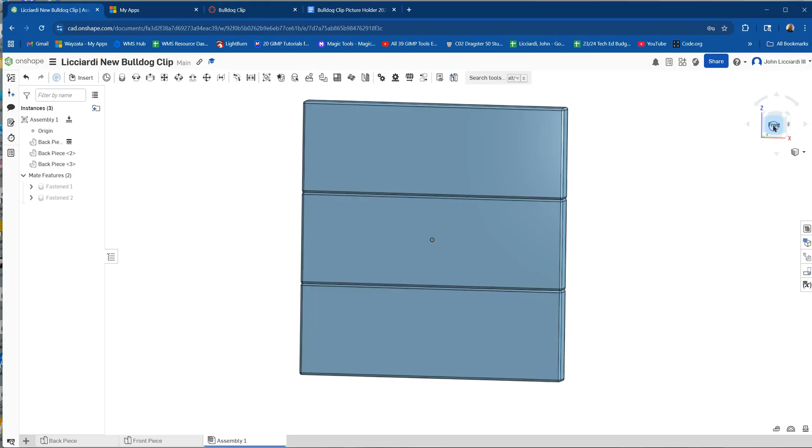Now in this particular case, I'm going to show you how to put the front pieces on with an offset, but we can't use the fasten mate. We're going to use something else called a planar mate. Now, whether you have these horizontal or vertical, it really doesn't matter.

I know some of you are like, but Mr. Licciardi, my wood pieces are vertical. It won't matter, as long as they're fastened together, it does not matter. So we're going to go ahead and insert. We're going to choose a front piece.

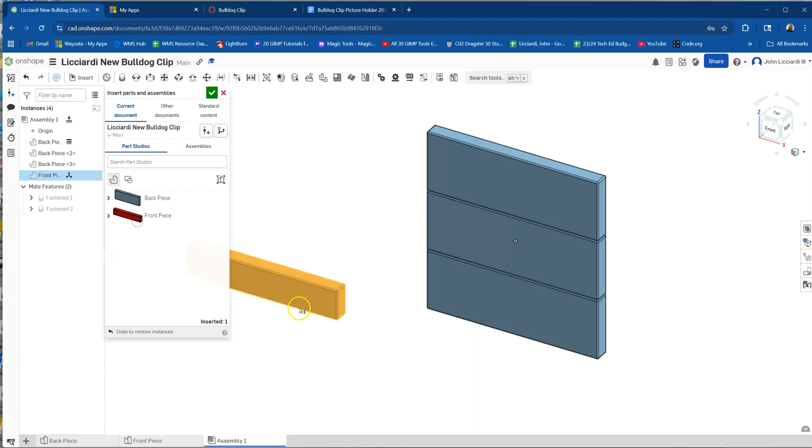Now, planar mates, they're not as easy. They require a little bit more work, but we don't have anything that we want for our little Pac-Mans that we did before. So planar mates up here. We're going to need to do 3 planar mates to make sure that this piece is successful.

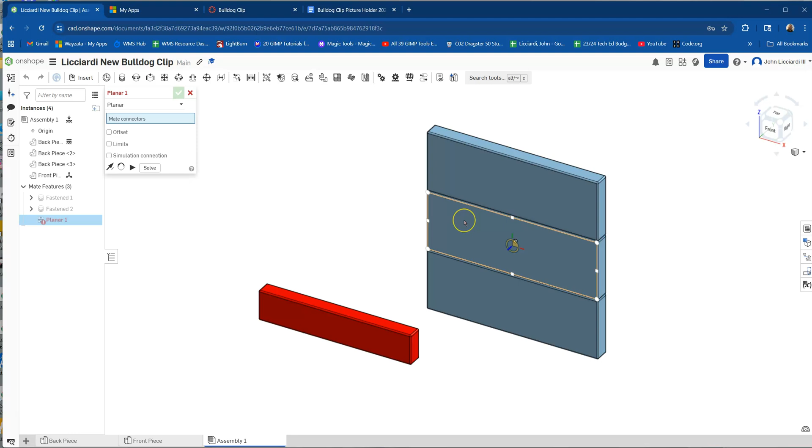And I don't want to be clicking on any of these Pac-Mans, I just want the surface. So be careful. So I'm going to click on this surface. It'll glow orange. I want this surface to go ahead and touch it.

Now, if you look closely, this is why I like color coding. It's inside. I don't want it inside, I want it on the surface. So I'm going to go ahead and flip it and hit enter or check mark.

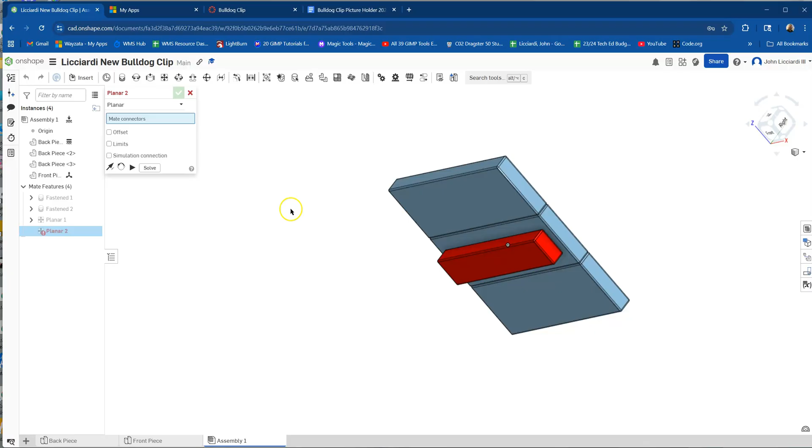Now I'm going to press escape on my keyboard, and there's a reason for that. I want to move this over, near the edge. Now, this piece should go across these 3. It should not be in alignment up here. It should be 90-degree turned across these 3.

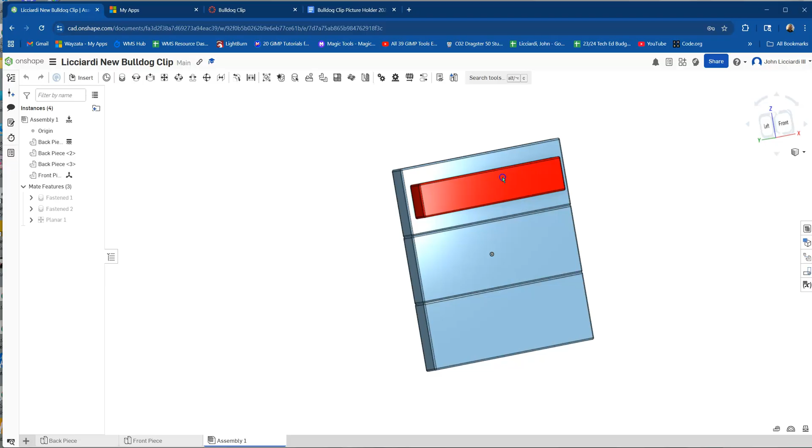We do not need, I repeat, we do not need to try to rotate it. When we use our planar mates, it will automatically snap to.

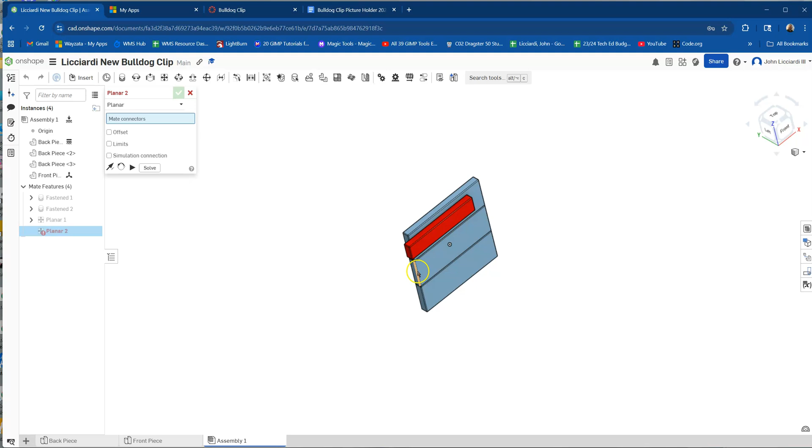All right, so now what I want to do is take this top end and align it with this edge. Watch what happens. So I'm going to zoom in, click that, and then click this top edge. Now, right now, you may have gotten some sort of goofy thing where perhaps this piece got jumped out or whatever.

Don't freak out, it's just a preview. I'm not excited about the way Onshape does their previews. Just understand that we want this piece to be on top of this.

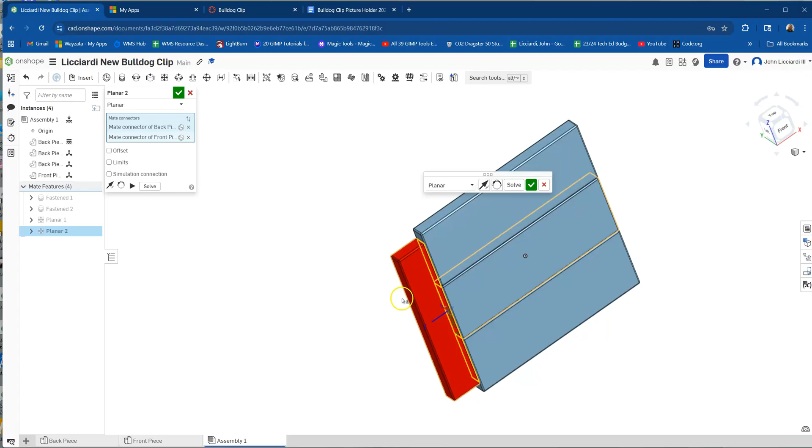Now, at this point, they're touching. I don't want them touching, I want them in alignment.

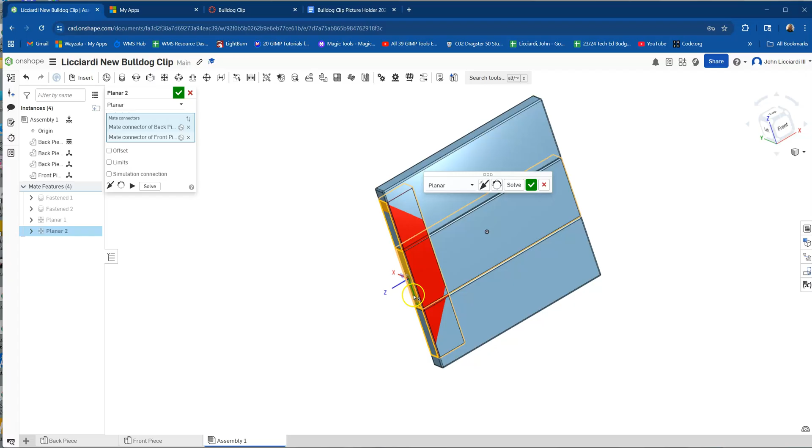So if I click this and flip the primary axis, you might say, Mr. Licciardi, it's inside. No, it's actually not, because I have this planar 1 that I actually mated the surfaces before. So I'm going to say, yes, I want those 2 surfaces in alignment. Check mark. You'll notice it pops out again.

Okay, so now I only have 1 more degree of freedom. It's showing me it does. And I need to take this edge and align them.

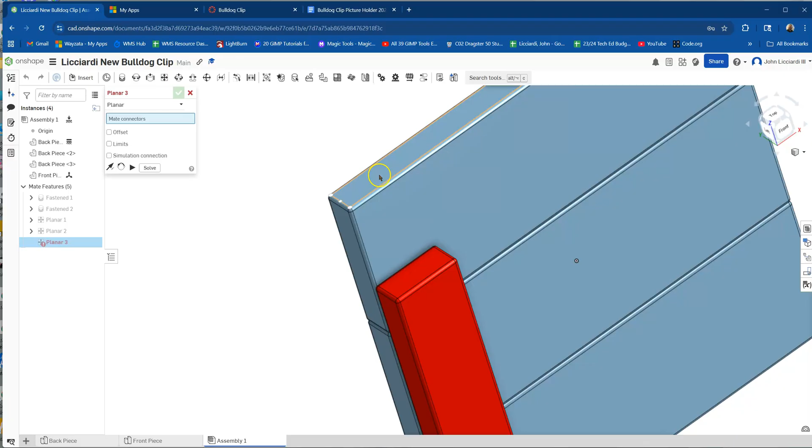So I'm going to go ahead and hit a planar mate. I'm going to choose this edge, and this end.

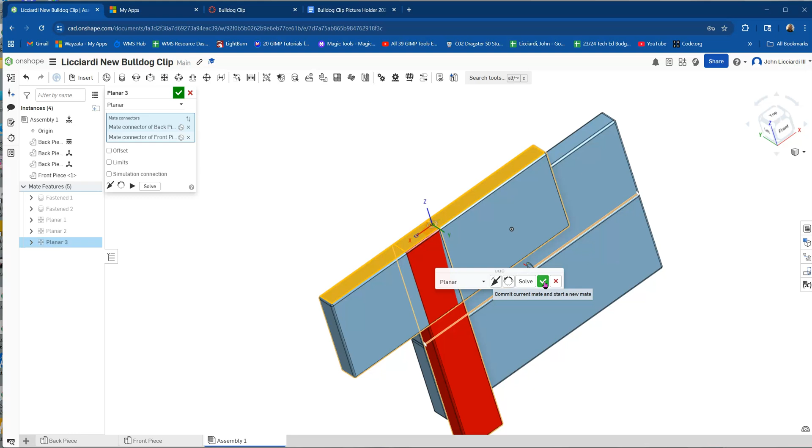And this is where that preview kind of kicks in. Oh my gosh, it's jumped out. I thought it was fastened. No, it is fastened, it's just trying to show you the mesh between the 2. I wish they put the smaller one to the already fastened one, but for some odd reason, that's what they do. Okay, so check mark, it snaps back.

Now, I did this on purpose because I've had a lot of questions about offsets and all that stuff. When we create our planar mates, this should be centered. So I know that I have a 1.5, I have an 8-inch wide piece, and I know that this is 9 inches because 3 times 3 is 9.

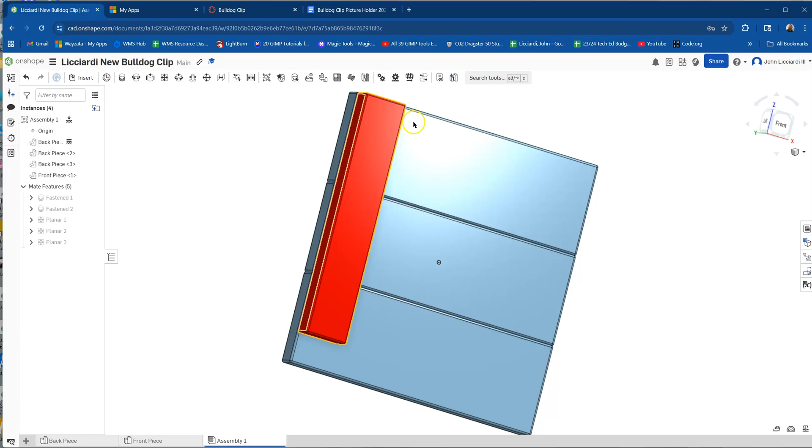So I have an extra inch left over that I need to split in half for this to sit in the middle. So what I want to do is go up to my planar mate, that I just did with this edge right here. And I'm going to double click and choose to offset.

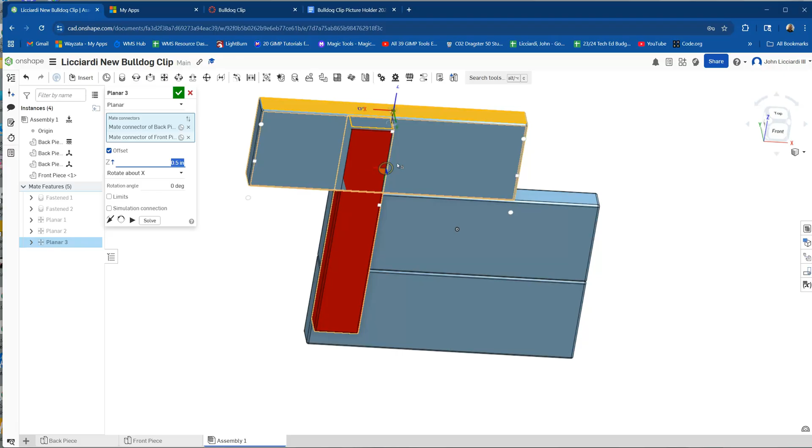Now, when I choose to offset, you'll notice that Z is the direction that we need. I'm going to put in 0.5, enter, and see if it adjusts correctly, in which it does. So you'll notice now there's a gap between this edge and this edge. And again, I'm sorry for the preview, it stinks, but it is what it is.

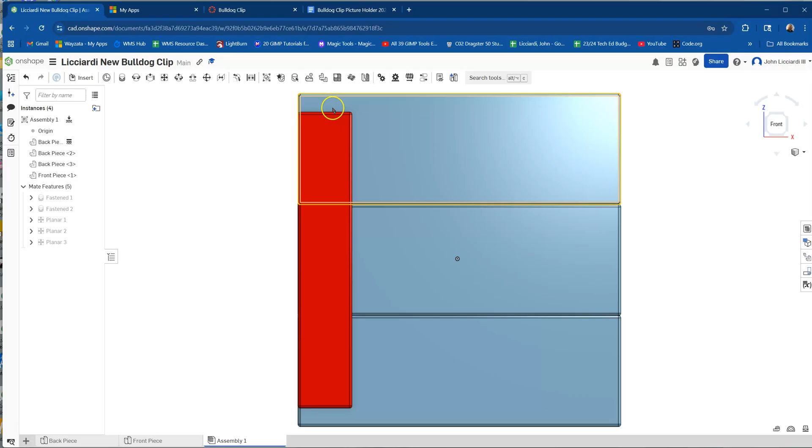All right, so once I do that, I hit OK, and you'll now notice that it is centered, 1/2 inch here, 1/2 inch here. Now we're going to do the same exact thing for this one.

Double click, we're going to choose offset, Z, put it down 0.5, enter. Now, if you did it and it goes the opposite way, you can just put negative 0.5 and it goes the opposite way. But in this case, it worked out, so 0.5.

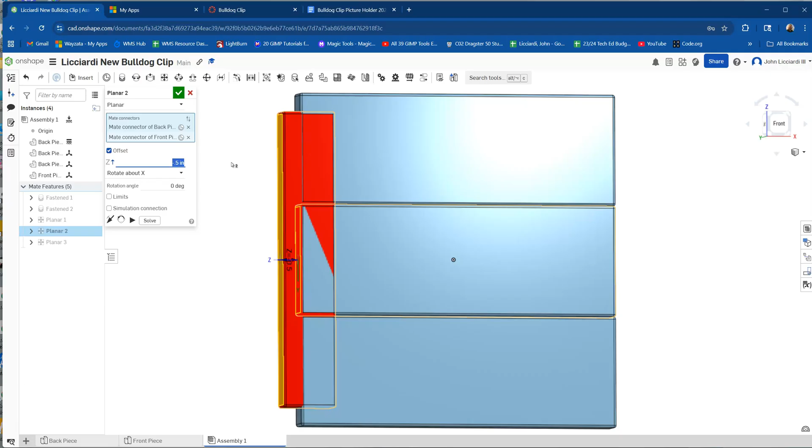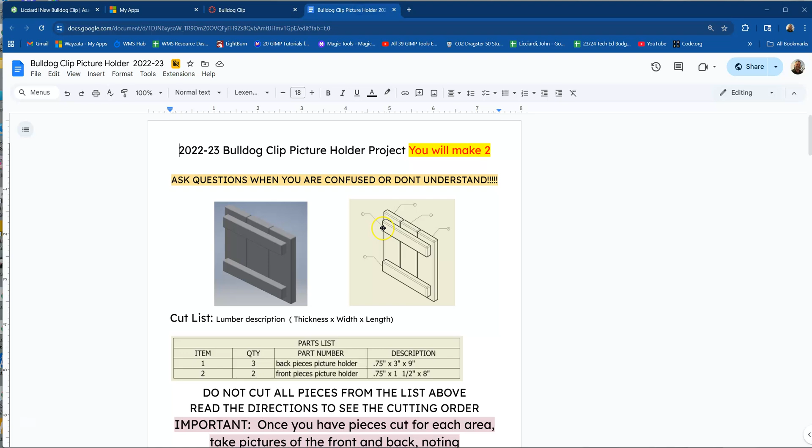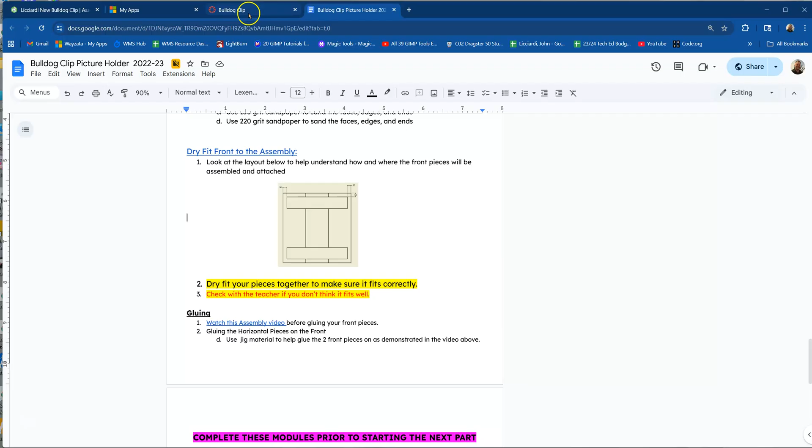When I hit enter, you'll notice it pops back and I am perfectly centered on that. So we're going to do the same thing, rinse and repeat. If you look at your project plans, you'll notice down here, it does actually have 0.5 and 0.5 offset. I'm showing you what that is.

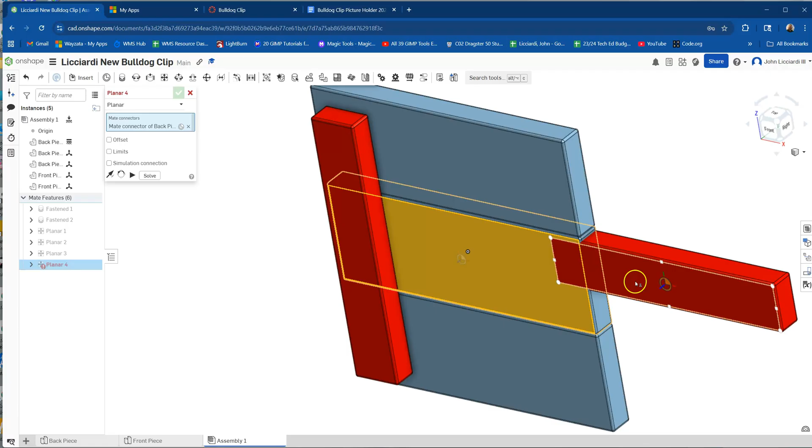All right, same thing, opposite side. Insert, front piece. Yes. Planar mate, this surface. Flip it, I want it opposed and touching. Yes, escape key, move this over slightly.

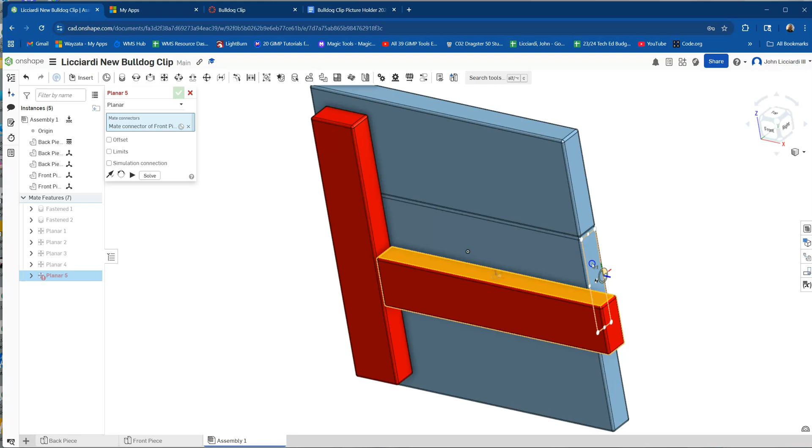Planar mate, I want this long edge and this end to mesh. Yes, that's what I want.

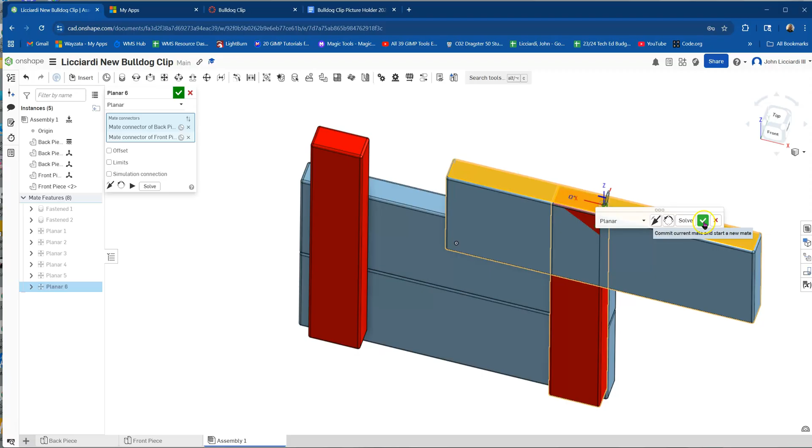Don't get afraid if it starts snapping stuff around. Last but not least, I want this edge and this end to line up. Yes, they do, otherwise you can flip it. Enter. Now, let's dive back.

Double click planar 5. We want that at 0.5 offset. Oh, went the wrong way. Negative 0.5 solves it.

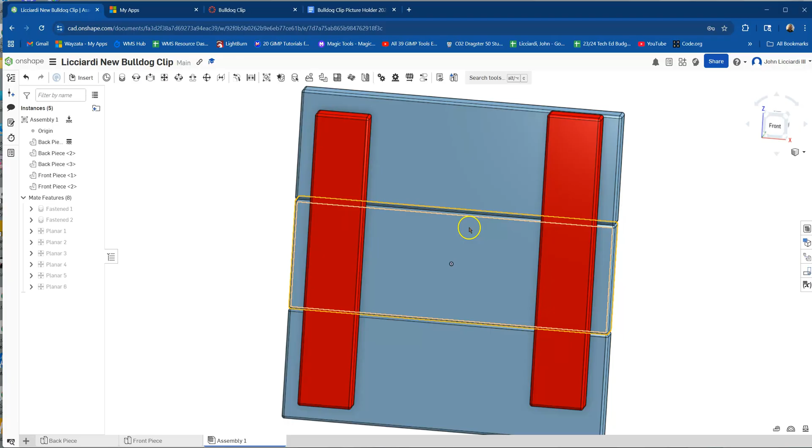All right, planar 6, same thing, offset, 0.5. Whoops. Yes, that's what we want. All right, now you have your piece perfectly done. So that's how we use our planar mates.

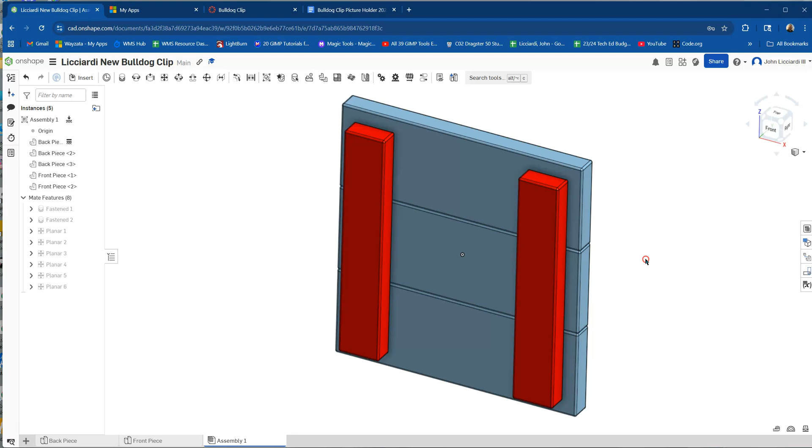I know it's a little bit long-winded, especially going back into those offsets, but I think it's very important that you understand the preview versus the final result. So I'll see you in the next video.